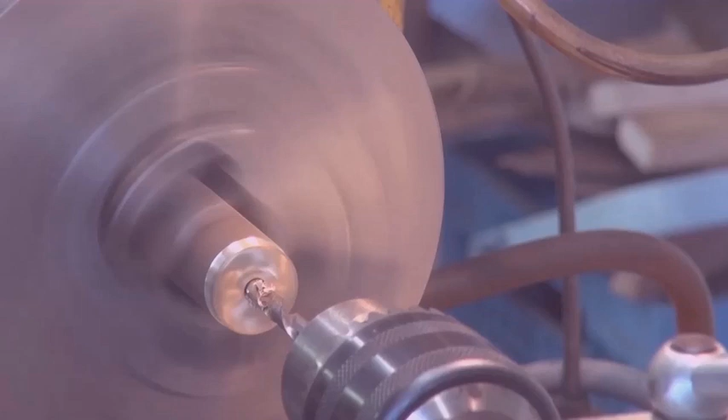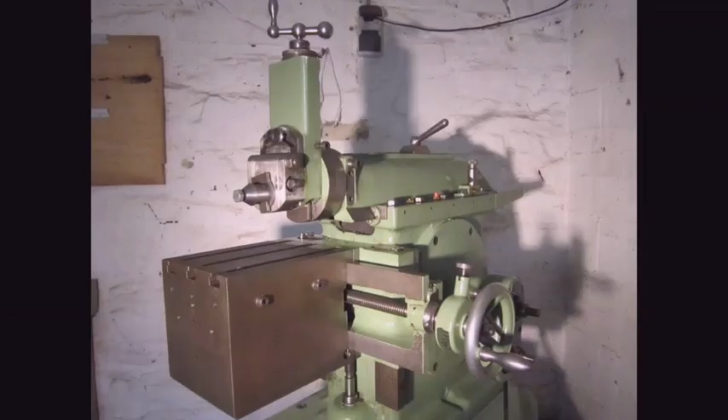A few weeks ago, Mr. Pete posted a two-part video where he shows us how you can make a hammer on the shaper. It's a really interesting video, and if you haven't seen it, maybe go have a look. There's a link to his video in the description below. Now we're talking about a typical school project, just like this one. This is the hammer I made when I was in school, a long time ago.

His video is stuffed with useful tips and safety warnings, and I think that is a really good thing. Of course, Mr. Pete is a professional explainer and I'm just an amateur. But where I had a little personal difficulty is when he tells us that shapers are slow, and he repeats that a few times.

Sometimes shapers are slow and sometimes they're absolutely not slow. To illustrate that, I'm gonna make the exact same hammer as Mr. Pete made, but I'm gonna do it my way. I'm not telling you it's the way to do it, it's just my way of doing things. I have here an ugly thing. I'm gonna cut a piece off, and this ugly thing we're gonna turn into a beautiful hammer on the shaper. But before we start talking hammers, first we're gonna talk a bit about the shear tool.

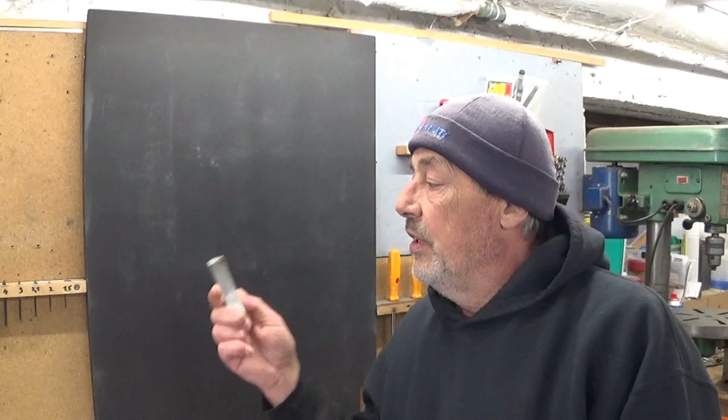In a previous video, maybe you remember, I worked this surface with the shear tool, and in the comments there were a few questions about the shear tool, and some people asked me if I wanted to explain a bit on the blackboard. Of course, let's do it.

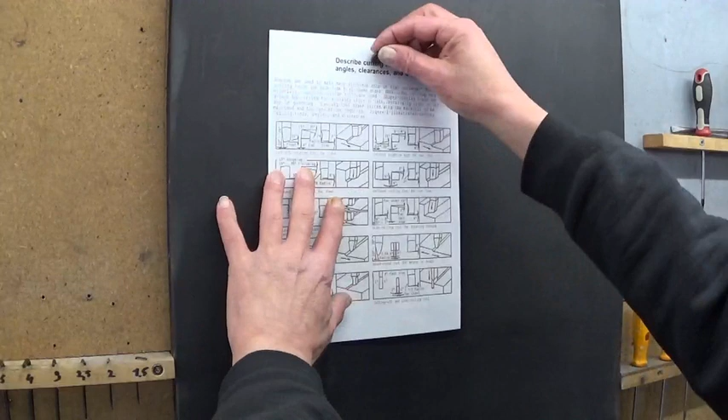I did a little bit of my homework here. This is one page of a shaper book. Of course, I'm not gonna print out the whole book, one page is enough. And the shear tool is marked here. It's the only book I could find that talks about the shear tool. Now the question was about angles. All the other tools, the angles are marked. On the shear tool, the angles are not marked. So here we are a bit on our own.

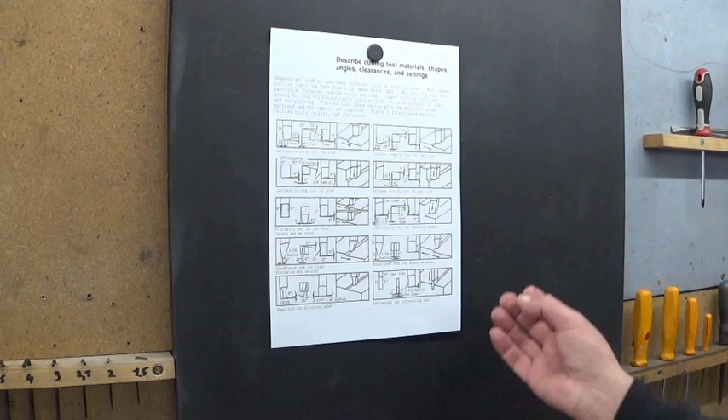Okay, let's take this paper away, don't need it anymore. This shear tool, I'm gonna make it bigger on the blackboard. This is the front view. The tool is gonna cut out of the blackboard into the camera. Side view, the cutting action is that way. And here we're gonna make the bottom view, held like this. Okay, front view, what do we see?

It's a bit hard to draw, of course, because it's 3D. This is the part that I'm gonna take away, it will be a bit easier to see. And then the bottom view is like this, and the side view rounded like this.

Okay, now this face is of course this face, and the angle I made between this face and the vertical is 3 degrees. The radius is as big as possible. It must be, I think, about a radius... radius is a little off, of course, of 100 millimeters, which is about 4 inches. Yeah.

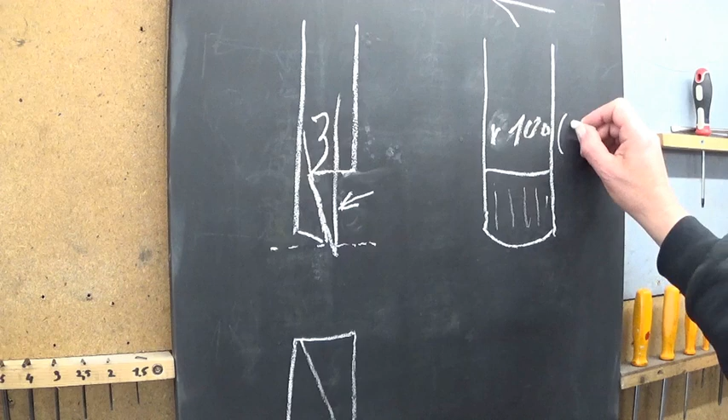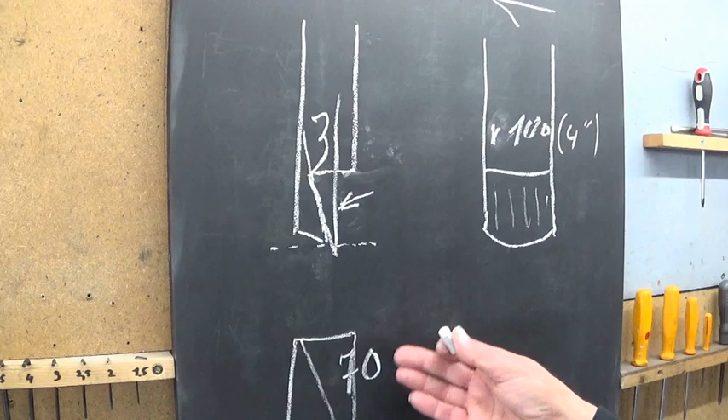This angle I made it at 70 degrees, and in the book I showed you they talk about 75. Okay, it's 15 in the other way, but 70, 75, that will do. I think the shear tool is one of the most challenging tools to make, because you use these numbers and sometimes it works and sometimes it doesn't. So I think it's important to make one, experiment a little bit with it.

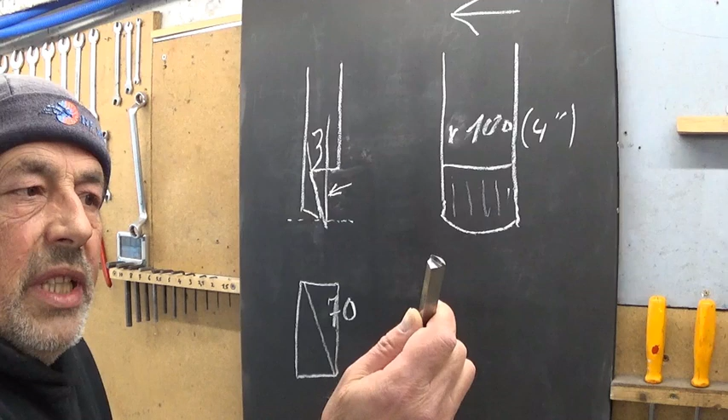In one book I found online, they talked about this angle. The face is angled at 45 degrees. That's not enough, that doesn't work. I made it here at 70 degrees. I don't know if you can make it out a little bit. This one is not good. This one is much better.

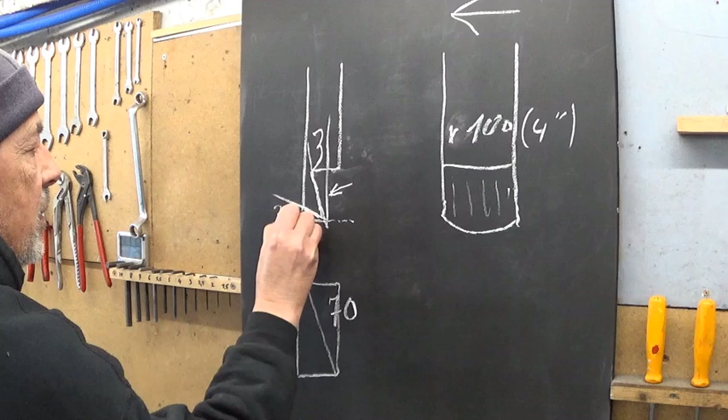And this one, of course, I'm gonna try to mark it here. Somewhere between 2 and 4 degrees will do. Not too much—it's better to make it 2 degrees than 4 degrees, otherwise it wants to dig in too much into the material. So I hope all this makes a little bit of sense now. If not, don't be afraid to ask questions, and we'll see what we can do. Of course, I cannot answer all questions.

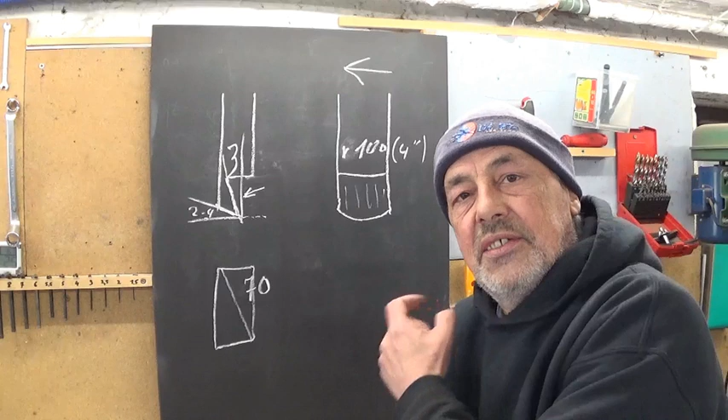I'm not a specialist, but I try and experiment and then see what happens. Okay, enough talking about shaper tools.

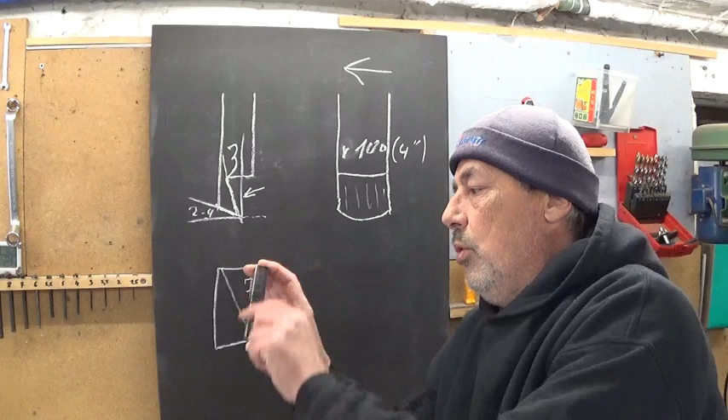Let's talk hammers, because in the meanwhile my other self prepared the blank with the outlines on it. Let's go for it. To install the workpiece on the shaper table, this time I'm not going to use special setups and scrap metal fixing things. This time I'm going to use a vise.

Now, if we put the vise on the table, we can put it this way, or 90 degrees this way. You're gonna tell me what's the difference. I'm gonna take apart. I take this bigger thing, it's easier to see on camera. I can put the part in this way and cut in that direction, of course, or put my vise this way and cut in the length.

Let's go back to the blackboard and see what's the difference. Having a little blackboard like this one in your workshop is really handy, because I make my drawings and sketches on it, and wherever I am in the workshop I can see it. No need of glasses to watch this little paperwork, and then maybe I can't find the paper anymore. In fact, this one isn't even a real blackboard, it's a part of a dishwasher painted black.

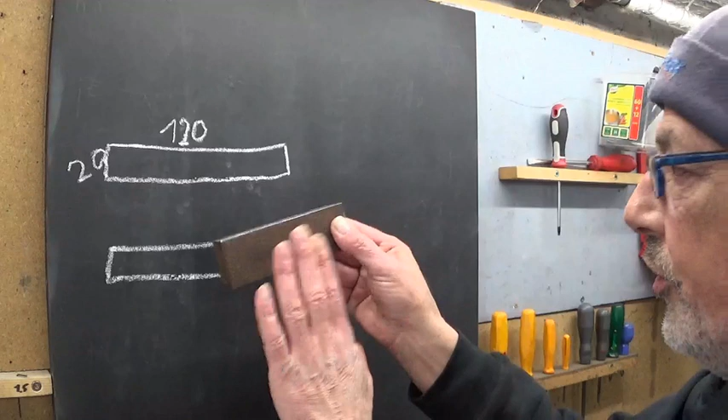Here you go, okay, a little bit of theory. This was the part I showed you. Of course I'm not gonna work this one, but this is easier to see. I'm gonna work this face, yeah? And this face measures 120 by 20 - this is in millimeters, but you will see that in inches it's exactly the same, and you will quickly understand the difference. This surface I'm gonna cut this way, the tool is moving that way.

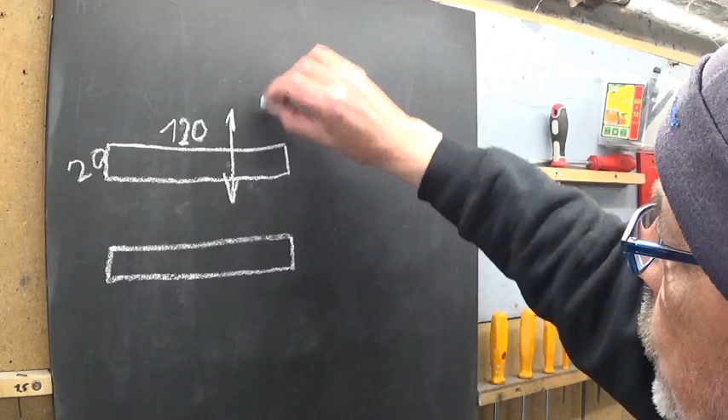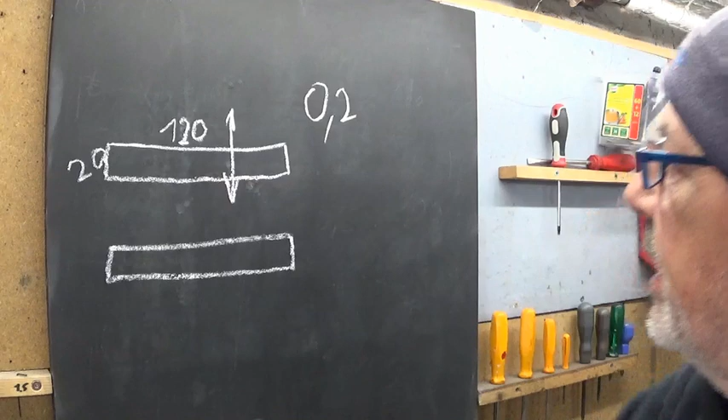We're gonna use a step over for roughing of 0.2 millimeters per stroke. The machine is running at 100 strokes a minute. Take a magnet here. Voilà.

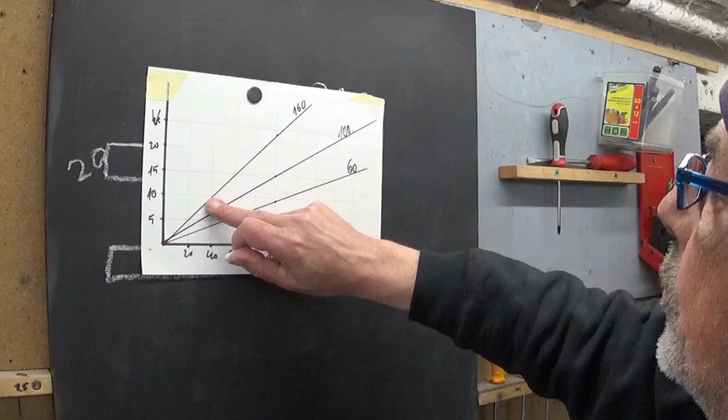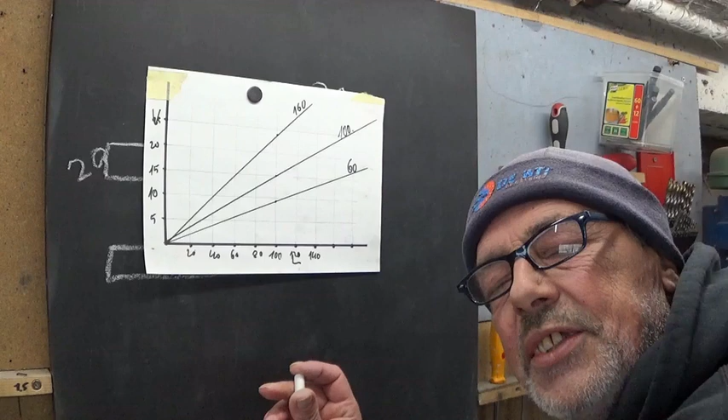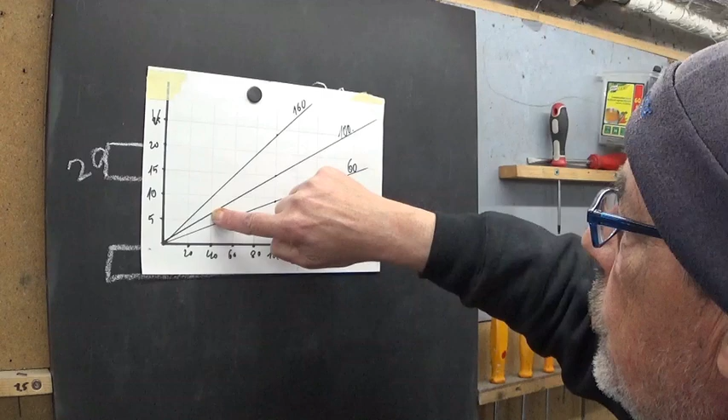The part is 20. We leave 15 before the cut, 5 after the cut, makes 40. If I put my machine on maximum, 160 strokes a minute, we have a cutting speed of 10 meters a minute. Not enough. Be honest with yourself, almost no one changes the speed on their shaper. So this one is now set at 100 strokes a minute. 100 for a stroke length of 40 is somewhere between 6 and 7 meters a minute. You will never have a good finish with 7 meters a minute.

Let's continue. Step over of 0.2. So when we start cutting here, we do all the surface. 120 millimeters gives us a total of 600 strokes before the whole surface is cut.

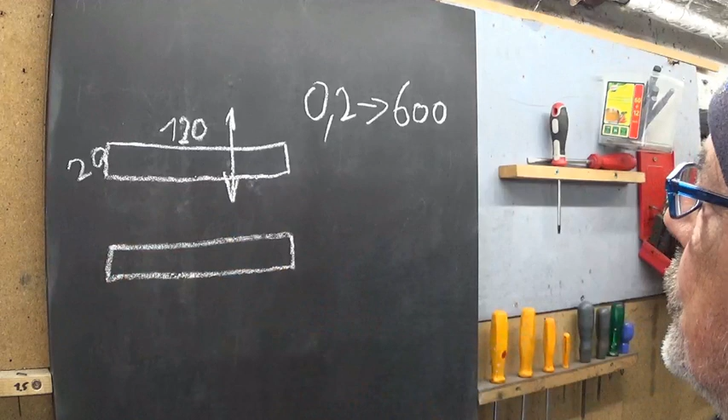This surface we're gonna cut in the other direction, so we put the vise 90 degrees, of course. Step over, same, 0.2. That gives us a total number of strokes to cut the whole surface of 100 strokes.

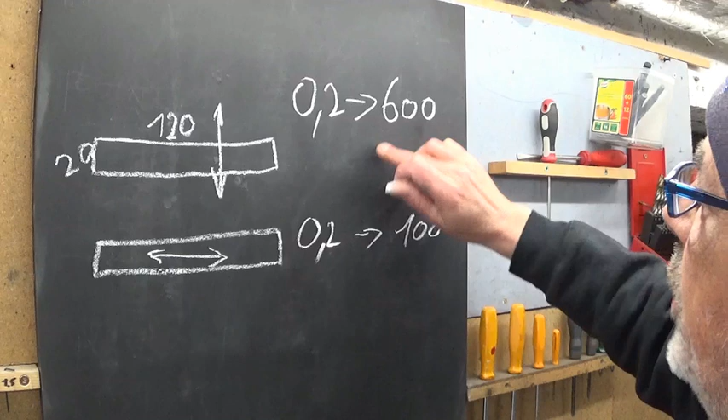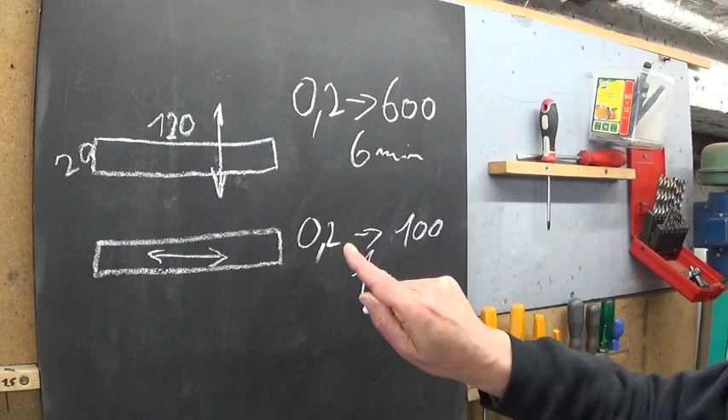600 strokes at 100 per minute is gonna take us 6 minutes. 100 strokes at 100 a minute is, of course, 1 minute. Here shapers are slow, here shapers are not slow. It depends how you use it.

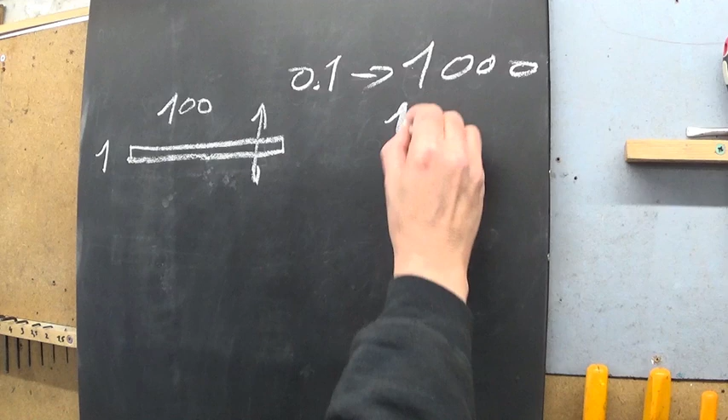Let's say for a special project I have to make, I need to cut a surface like this one, which is 1 millimeter, 100 wide. If we cut this way, and it's a finishing pass, we're gonna use a step over of 1/10. 100 millimeters divided by 1/10 gives us 1000 strokes. At 100 strokes a minute, this is gonna take us 10 minutes to cut this way.

We're gonna cut it the other way, like this. Step over 0.1 - 1 millimeter with a step over of 0.1, this surface will be cut in 10 strokes, which means 6 seconds and game over. Shapers are slow, shapers are not slow.

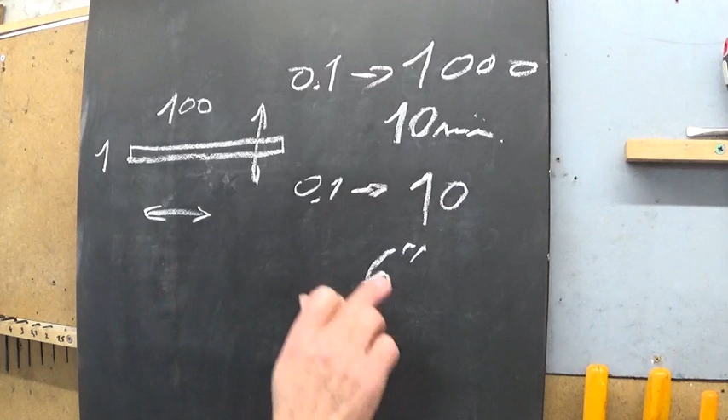We're gonna cut in the length. The chip has to break. If I don't make these notches, the chip will not break, it will stay on.

Now, Mr. Pete, he put his work like this in the vise. I'm gonna do the same, like this, and then put it at 45 degrees with his try square, a bit like this. It's a little bit of fiddling around.

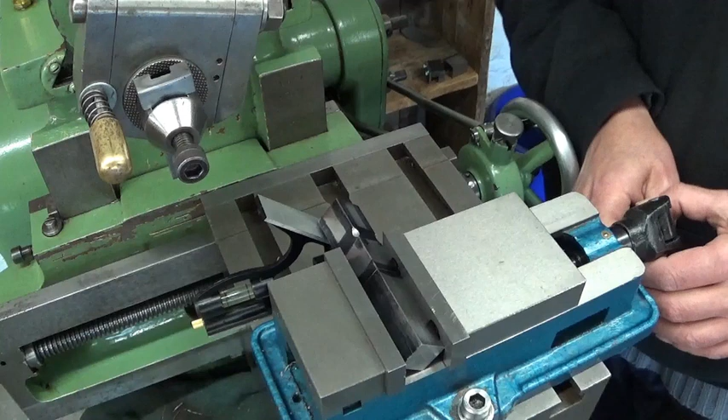Now, there's nothing wrong with this system, but I prefer using a V-block because of these corners. I took the burrs off, and you're not really sure if these lines are effectively parallel to each other, and now the work is held just on two very thin lines. It could maybe damage the jaws a little bit, because this is a very cheap vise and you never know if it's hard enough or not. So I prefer to use a V-block.

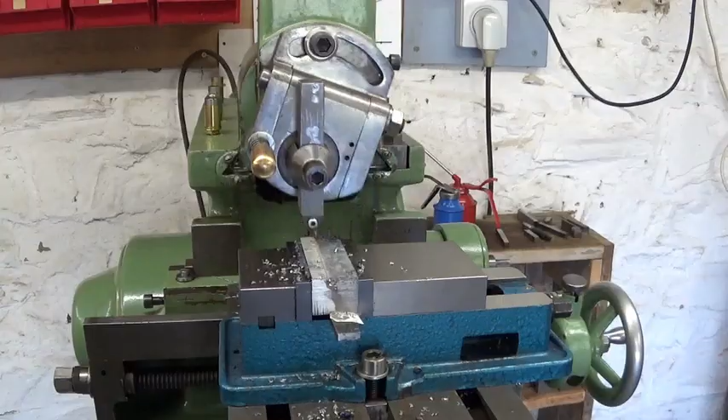Now Mr. Pete, he talked also about a V-block, but he couldn't find one. For me it's worse, I don't have one, so first I'm gonna make a V-block. Now I have a V-block. It's a nice little project for a Sunday afternoon, making a V-block.

That's fun. Now we put the V-block, of course, always, if we can, against the fixed jaw, because the moving jaw is moving, you're never sure if you have this 45 degrees.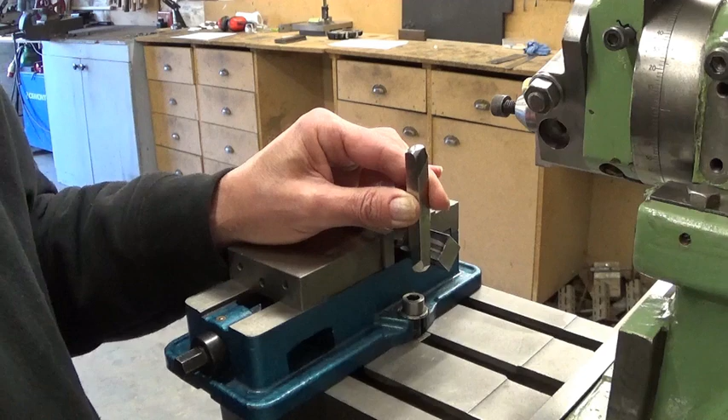Right, I can cut two faces in one setup. First I will cut this one, and after I will cut this one in the same setup. So I have to flip the part only one time. But I'm gonna show you also another way. We're gonna put the part horizontal in the bottom of the vise and put the cutting tool at 45 degrees. So we can cut one angle at 45 degrees, flip the part, cut the other one. That's the plan.

I'll do a little finishing pass.

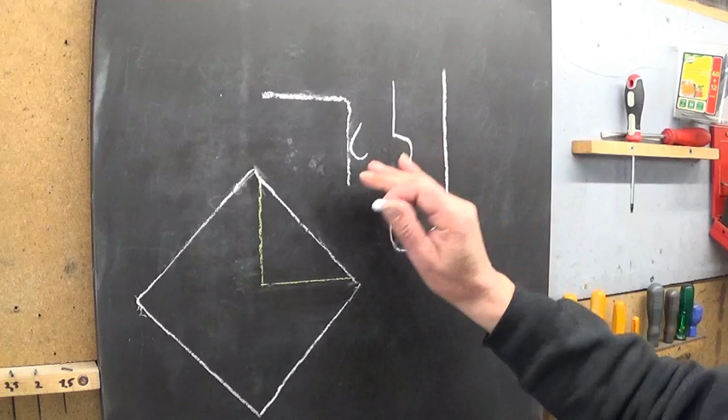Horizontal surface, same story, we're gonna touch off with the cutting tool, set the dial at 0 first, dial in what we need, we cut the whole surface, no problem. The touch point on the cutting tool will be here for the horizontal surface and will be here for the vertical surface.

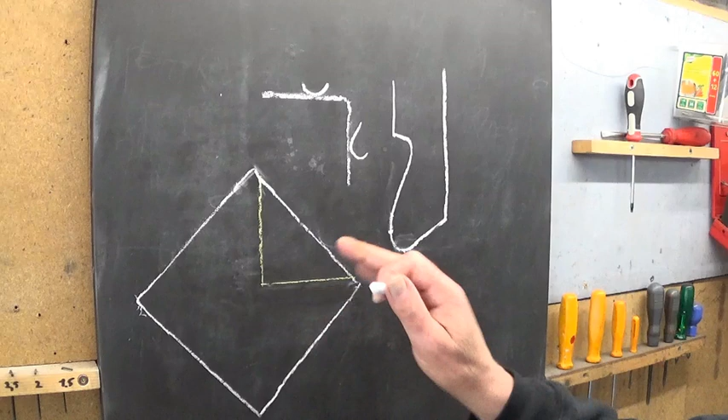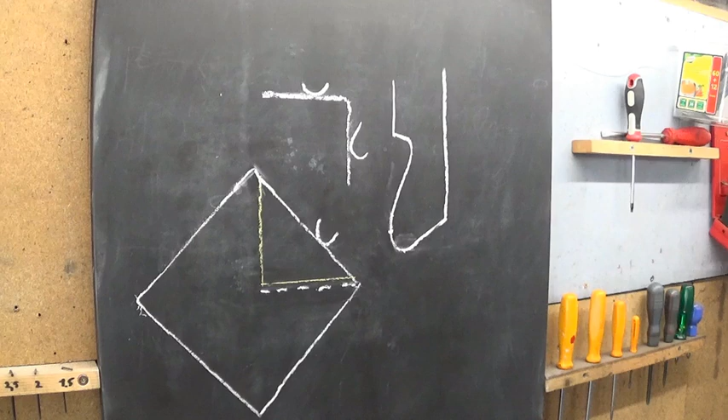If you want to cut a V-block like this one, or for the hammer, for these flats, it's about the same story, we have to touch off on a surface at an angle. Now in this case it's 45 degrees, but whatever angle, it's always a bit of a problem. So the tool, we're gonna make it touch off right here, dial in what we need, and the finished surface will come here, too low, because of the rounding of the nose. This is the horizontal touch surface.

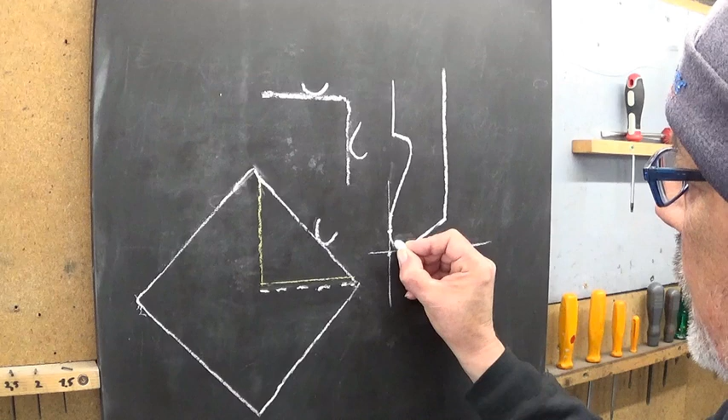Here is the vertical touch surface. So the 45 degrees should be here, but here is nothing. We touch off here, and this distance between the exact 0 and the radius of the tool will be the distance you have cut too much. So be aware of that.

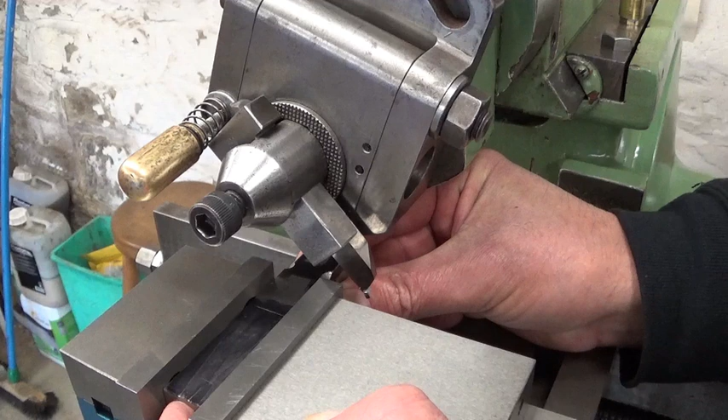I set the stroke length on maximum. Not a problem. And then of course I put my part in line with the cutting tool.

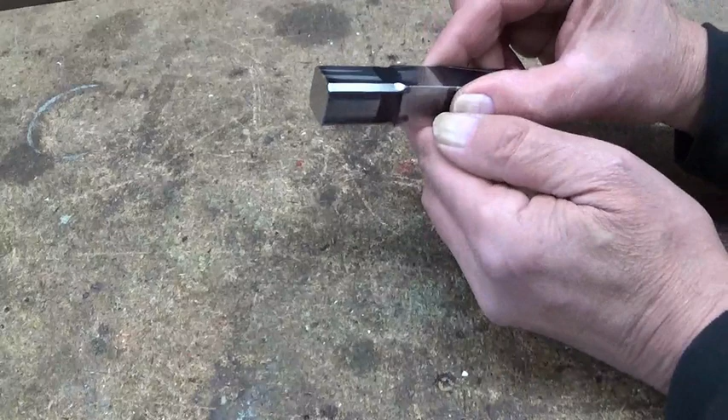Finished. I think it doesn't look too bad, and it was quickly finished.

Now of course the reason why I cut first these features and not the point, if I cut first the point I lose all this gripping surface. I will be left with only a little surface to clamp on with the vise. So first we do these little features and we still have these flats to clamp on with the vise when we put it the other way.

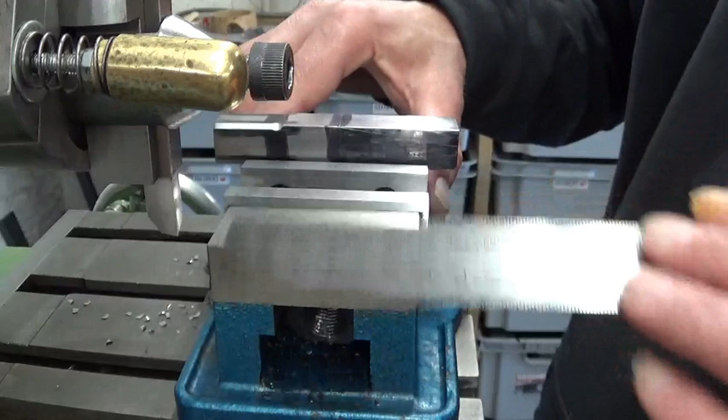To put the part in place, we're gonna do the same as what Mr. Pete did. Take a ruler, this is the other half of my square, put it here on this fixed jaw. Fixed jaw is always better than the moving jaw. If we put it that way, if the tool grips the part, it's gonna grip absolutely at the beginning of the part, which means it's gonna push out but also lift up, and that can be a serious crash. So that's why I prefer to put it this way. I can hardly see the line, but that will be okay.

Always be careful with these cutting tools, because cutting tools are very good in steel, and I learned the hard way that they are also very good in fingers. So be careful. I'll take my hammer.

To make it easy to set the zeros, I move the cutting tool just above the line and then come down until the cutting tool is scratching the line we made previously. This is where I set my zero. You can set the zero touching this edge here, but who knows how deep we have to cut. Now we know we have to cut until we reach the zero. Now we can move the cutting tool to the front, bring it up—that's a bit too much, that's okay. Voila. Now we can dial in, for example, 1 millimeter.

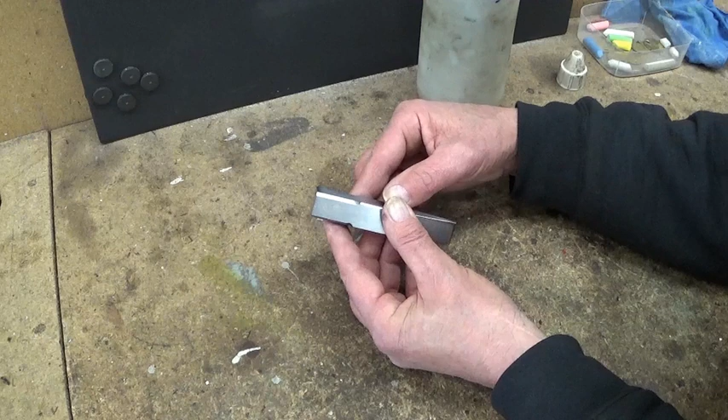I think the finish is decent for a roughing tool. There's not really a problem. You still see the lines and the outlines I made here to see where I have to cut, and then the file marks are a little bit too deep, so I had to cut this a little bit deeper to be good, but I can give it a touch with a file or on the belt sander.

Now, if we're talking machines, I think it's important to compare what can be compared. This is a small shaper. Compared to a milling machine, it should be a small benchtop milling machine, right? If I have a big shaper, it could be like the typical milling machines we see in machine shops, these nice big milling machines.

Now, if I make this part that I already showed you, this surface, in the shaper I took off 2/10 of a millimeter in 3 passes. So this took a really long time. I didn't time it, but it takes a long time. Do this in a nice big milling machine with a fly cutter, you dial in 2/10 and in no time this surface is finished and we don't touch anymore.

Shapers are slow. If I do these corners on my brand new hammer here, do this on a milling machine, you can put your hammer this way in the vise and you can do 2 faces. I think the setup you need to put on the vise and the tool, the setup of the machine is almost, or I suppose, a bit the same for a shaper or for a milling machine.